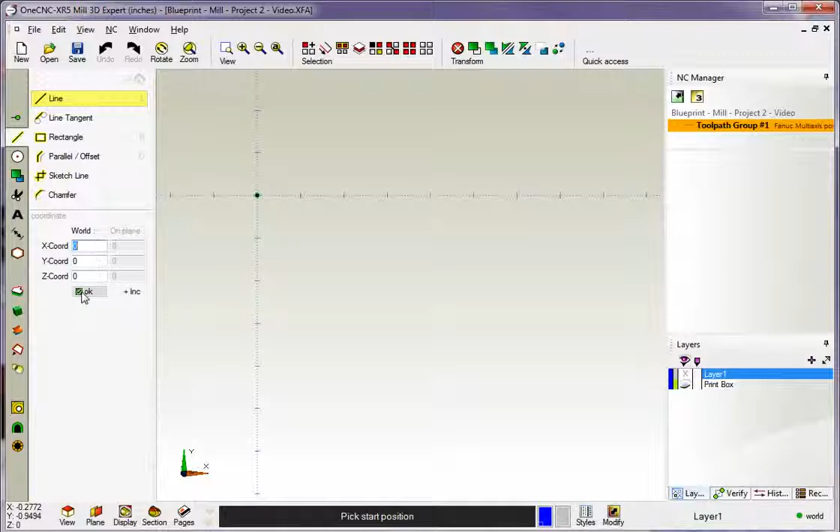Let's head over to the main toolbar and select line, and I'm going to use coordinate input for this. We're going to start at x0, y0, z0. I'll click OK for that. Now we're going to head over to x of 7 inches. That looks good, so I'll click OK.

Now we're going to go down to y minus 2. Notice how we're only typing in the axis that changes. We're going to use the same x value here, so we leave that alone. Just type in a brand new y value and then click OK. Now we're going to head over here to x of 3 inches. That looks good, so we'll click OK.

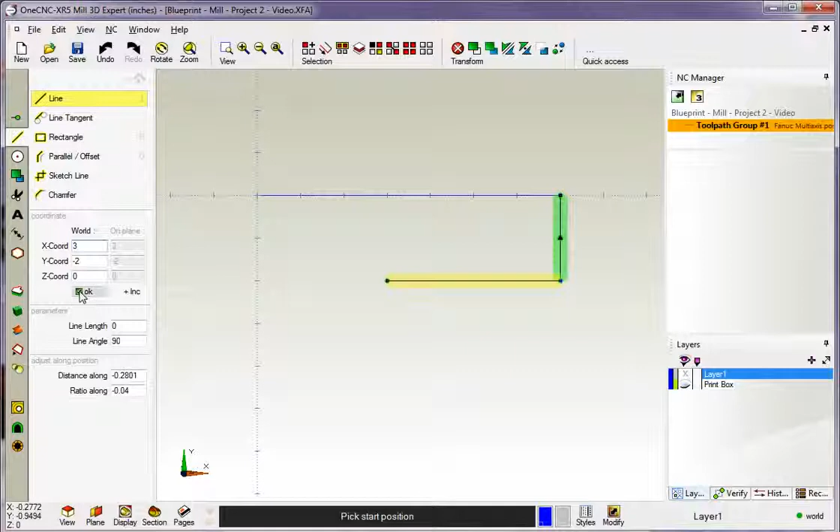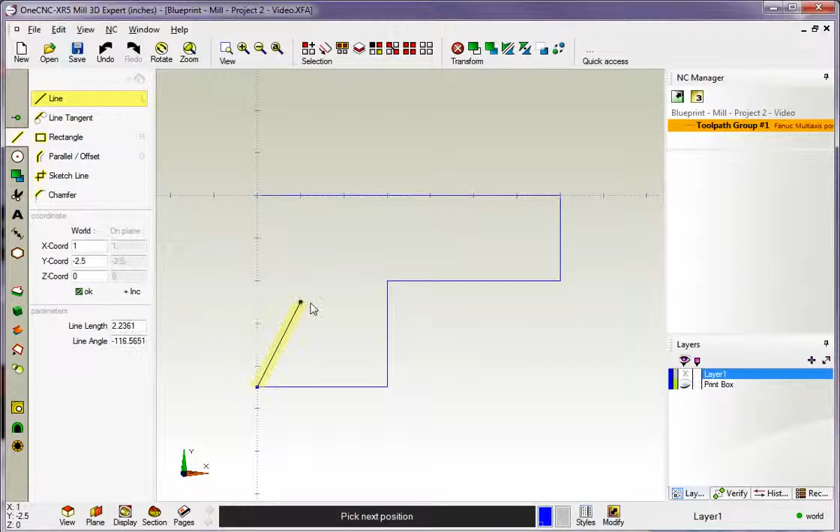Anytime you're putting coordinate input in, you can always come over here and start snapping. Because our dimensions are pretty simple, we could come down here to y minus 4.5 and left click, and back over here to x0 and left click. And of course you can come back up here and left click, but I want to point out that it's easy just to head back over to coordinate input again. If you wanted to, just head back over here, type in your coordinate values, and don't forget to click OK.

When you're finished, you can right hand mouse click, and there you go. Or you can select a different option. So you can see that when typing in coordinate input, it's easy to swap back and forth between coordinate input and entity digitizing, grid snapping, datum snapping, or whatever you need to do there.

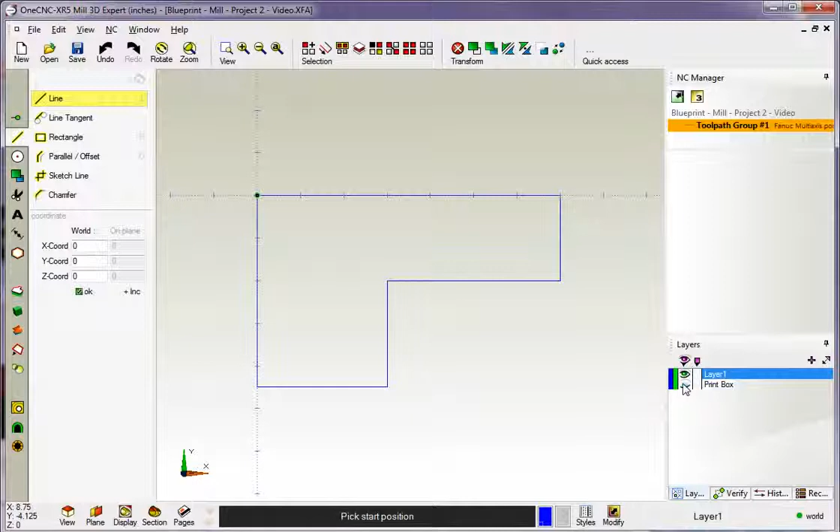So let's check this up against our blueprint now. We're going to bring our print box layer back on. That's looking pretty good. Now we can see we have some fillets here. It looks like these are a 1/2 inch, typical 6 places. So we're going to put a fillet on all these corners. Let's turn our print box layer off.

Remember, a fillet is a type of an arc, so you want to select your arc or circle tools. I'm going to grab fillet, and for the fillet radius we're going to put in a 1/2 inch. And it doesn't matter the direction in which we digitize. In fact, if I grab that line first with the left click, I can come over here and get a preview.

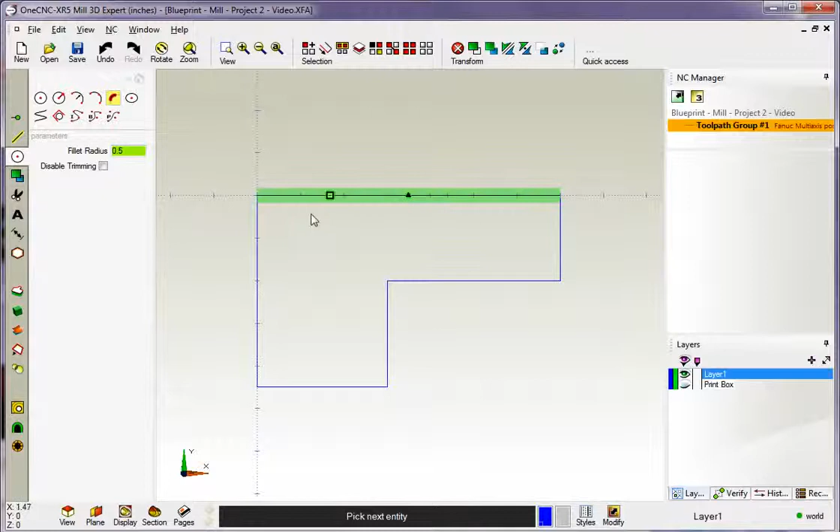I can even come over here and get a preview. It really makes no difference which direction you're going. I'm going to left click there, left click and left click, left click, left click, left and left. It doesn't matter which direction you go, it makes no difference at all. Just left click both those lines, and when you're finished, just right hand mouse click.

And it doesn't have to be lines. Of course, you could be putting fillets on circle line, circle circle, line line, whatever you need to do there. Let's bring our blueprint layer back on.

That's looking good. Now it looks like we have 5 holes. These have a radius of 0.19, typical 5 places. So let's turn that off.

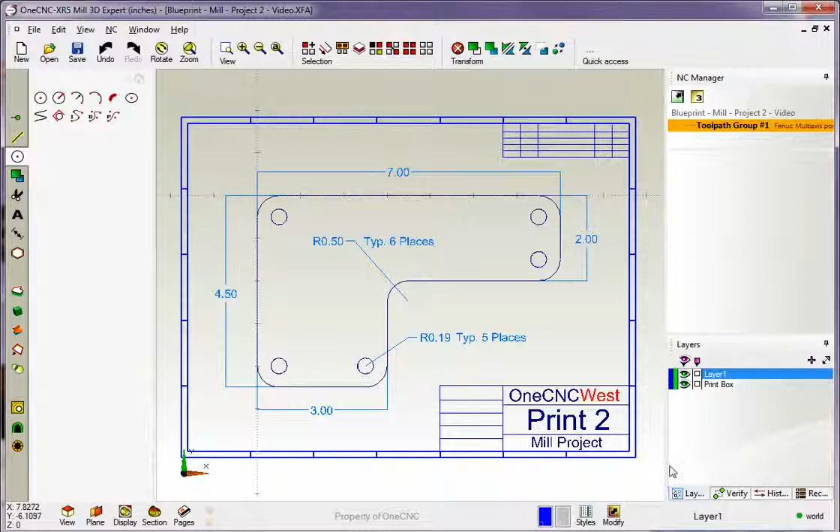We're going to head over here and we're going to grab our standard arc tool, and the radius is 0.19. So I'm going to type in 0.19 for the diameter, but then I'm going to type in times 2, and we'll hit the equal sign, and that gives us 0.38 as the diameter.

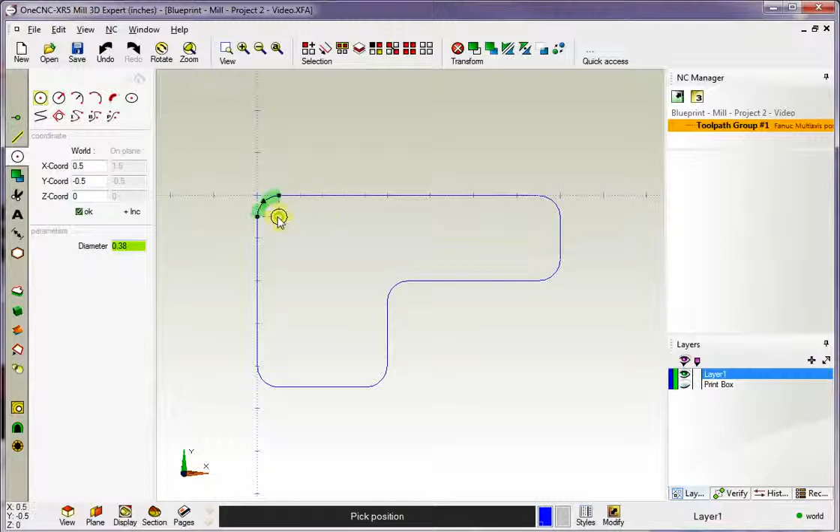And now it's just a matter of snapping these arc centers. To snap an arc center, just wait till you see that little diamond, left hand click, left click, left click. We're going to come down here, left click, and left click, and when we're done we can right hand mouse click or select another option.

So I think that looks good. Let's double check it. I'm going to bring our blueprint layer back up, and that looks good. So there is our next shape. That looks very good.